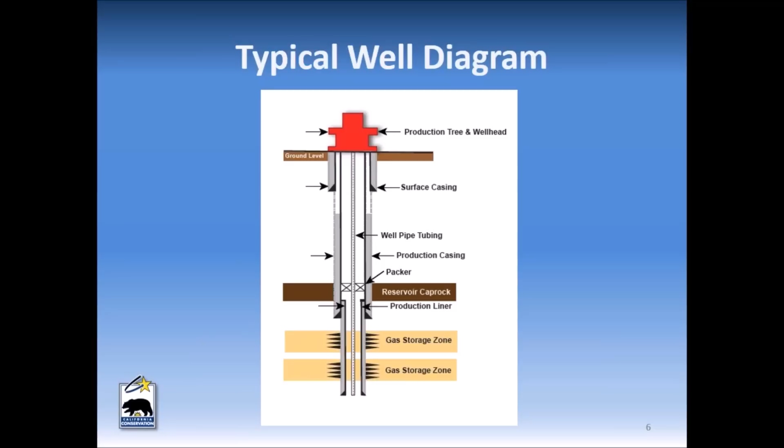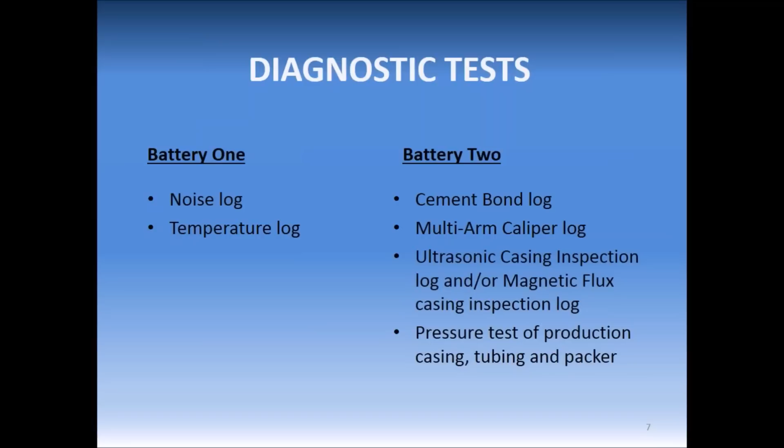In order for a well to be approved to return to service, Southern California Gas must conduct a series of 6 rigorous diagnostic tests. Those testing results are reviewed and validated by DOGGR engineers, including myself. The 6 tests were divided into 2 batteries.

Battery 1 test consists of noise and temperature logs. The first set is essentially an initial diagnostic. These logs can be run very quickly, taking 2 to 6 hours per well, depending on the depth of the well. No drilling or pulling rig is required to run them, only a wireline truck.

These trucks can be deployed very quickly, in a matter of hours. These logs were run as a screening criteria to determine very quickly if there were other damaged wells which needed immediate attention. We did not find any.

The temperature log is run from the top of the well to the bottom of the well. It's basically a thermometer at the end of a wire that's lowered into the well. Temperature should increase as you go deeper. The earth is warm and the increase is relatively uniform. So we are looking for cooling events or other temperature anomalies.

When gas escapes from a container, it cools the surrounding area. Your refrigerator and car air conditioning work based on this principle. Another reason for a temperature anomaly could be the movement of water, either because of shallow groundwater or water flood.

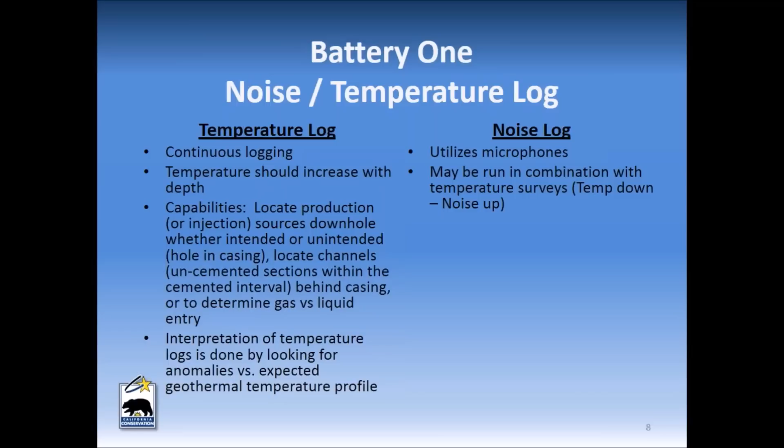The noise log is run from the bottom of the well back to surface. It's a very sensitive microphone and can pick up the tapping of a hammer or other surface noise from several hundred feet down in the well. Gas escaping from a vessel or chamber usually makes a high frequency sound, similar to a small hole in a tire after it's been punctured by a nail. The noise log will record that sound, which I will show you shortly.

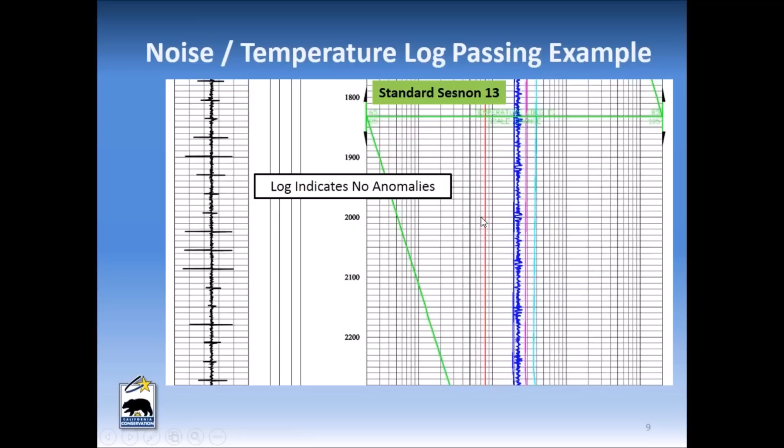So here we have an example of a passing noise and temperature log. This is an actual test result from an Aliso Canyon well, Standard Sesnon 13. If you look at this, you'll see these numbers here represent the depth of the well. This green line here is a recording of the temperature of the well, and as you can see, as you go deeper, the temperature is increasing. These curves here represent the noise.

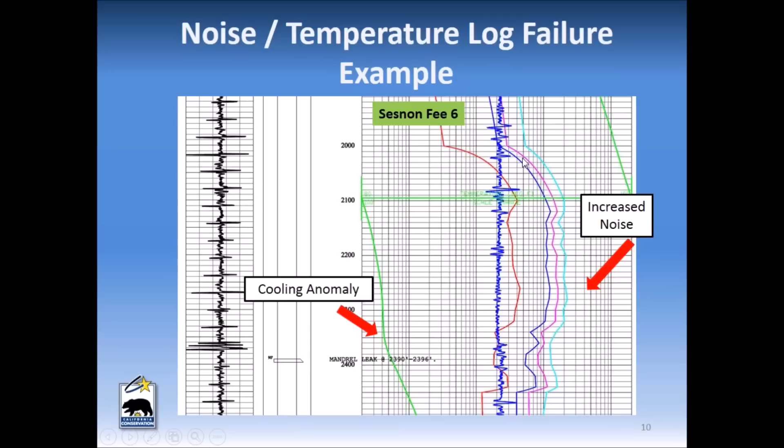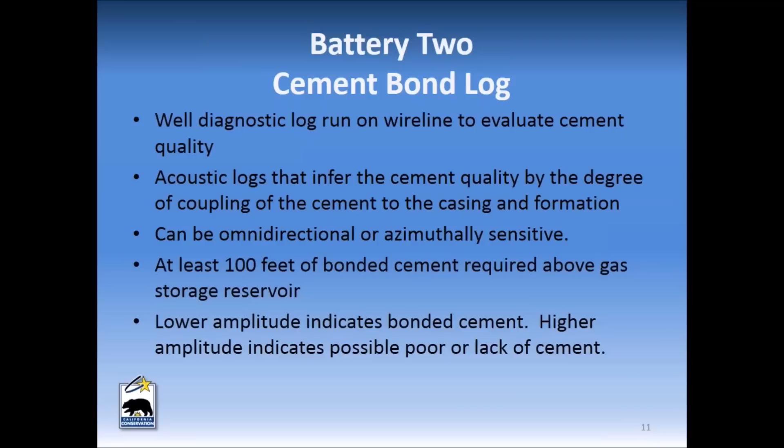A cement bond log test uses ultrasonic sound to evaluate the quality and location of cement on the outside of the casing. DOGGR requires at least 100 feet of bonded cement above the gas reservoir for a passing test. Low amplitude readings indicate bonded cement, while higher amplitude readings indicate poor bonding or lack of cement. This is the first test of the second battery of tests.

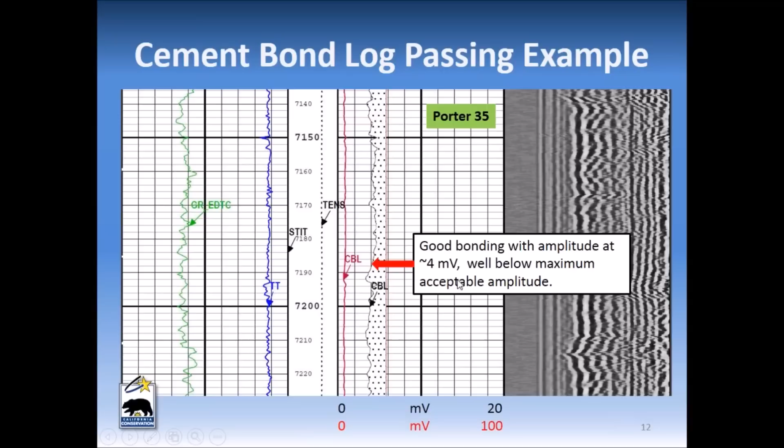Here is an example of a cement bond log run on Aliso well Porter 35 that does not indicate any concerns. Again, you can see these numbers here represent the depth of the well, and this is a presentation on the recording of the cement bond log. This is the scale 0 to 20, and this is the scale 0 to 100 for the red line. What you'll see here is we have good bonding with a recording of about 4 millivolts, which is well below the maximum accepted amplitude.

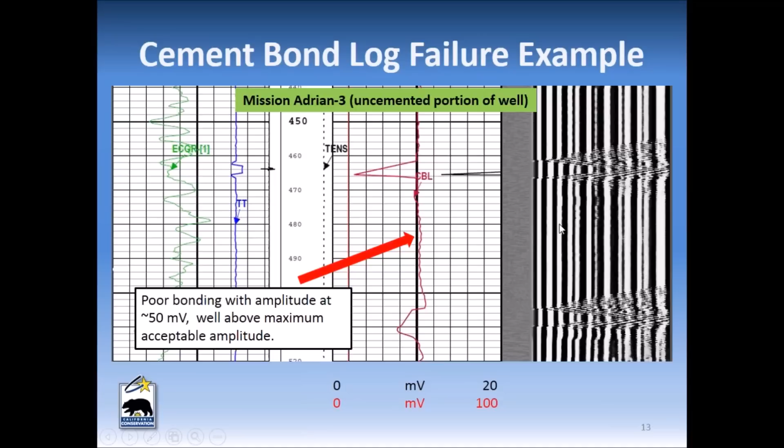You'll notice over in this track, this is what we call a railroad track pattern. So there's nothing for the sound to react to.

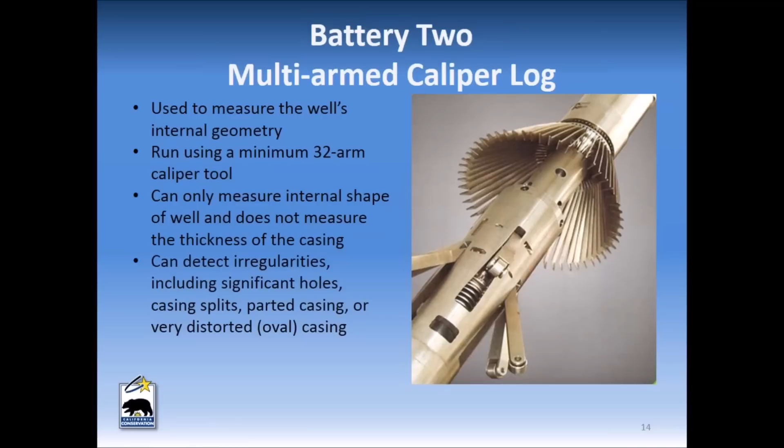The next battery 2 test was a multi-arm caliper log. As you can see on the tool, there are many fingers, arms, that are part of this tool. Each of the arms records what it's going against on the production casing. So this only inspects the inside of the casing and is used to detect corrosion damage and or other geometric irregularities.

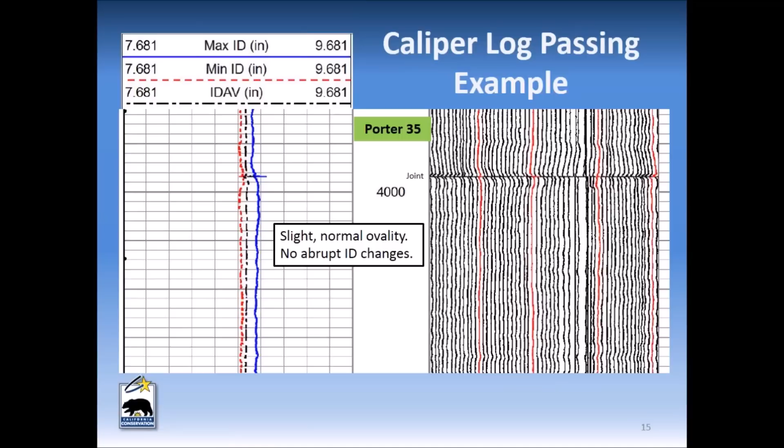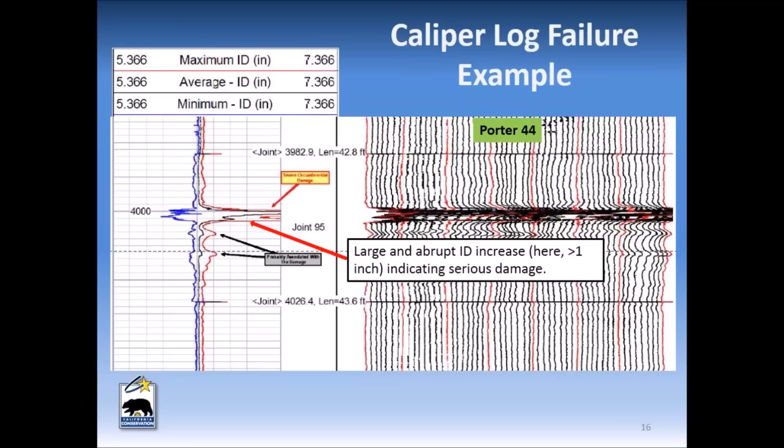This is an example of a caliper log failure from Aliso well Porter 44. All fingers of the caliper reacted to this failure in the casing, as you can see by this diagram. On this side, you'll see a representation of the minimum ID and the maximum ID, internal diameter, and you can see the damage is represented by this signature here. So this is severe damage. As a result of these tests, well Porter 44 was repaired with a new segment of pipe cemented across this section of the well.

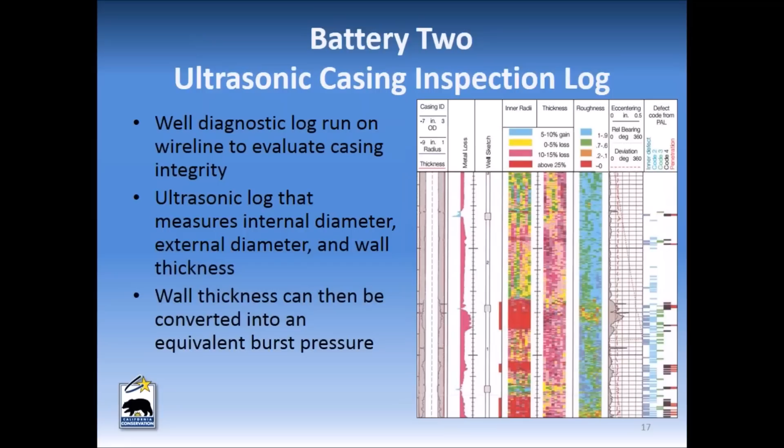The next battery 2 test was the ultrasonic casing inspection log. It uses ultrasonic technology to examine the casing thickness and cement bond quality. It can detect casing damage on the outside of the pipe, and this data can be used to calculate the wall thickness and subsequently an equivalent burst pressure rating using a formula called Barlow's equation.

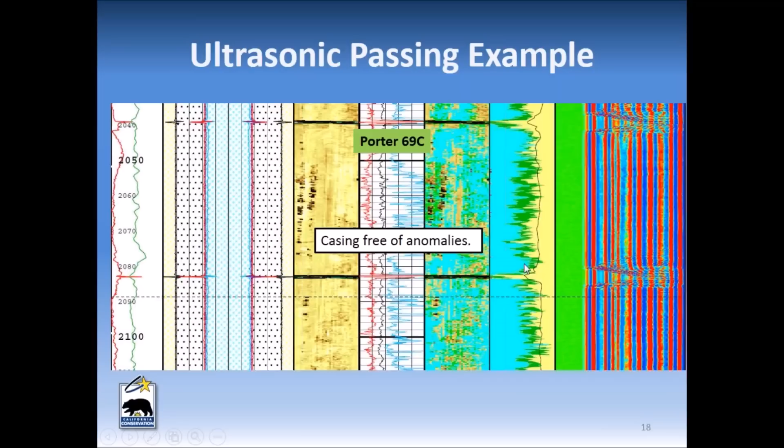Here is an example of a passing ultrasonic casing inspection test on Aliso well Porter 69C. The second track here shows good pipe as the blue minimum and red maximum curves are very smooth. The other tracks here are just representations of the acoustic impedance.

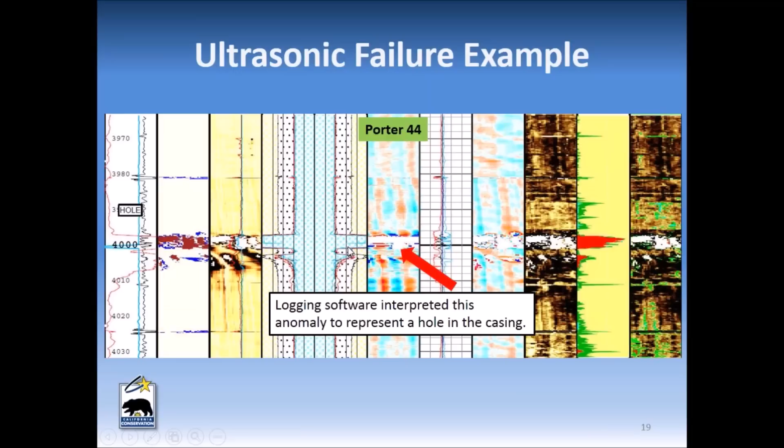Here's an example of an ultrasonic failure from Aliso well Porter 44, which was the same well that had the failed caliper test on previous slides. It's important to note that this was not another issue in Porter 44, just another test that caught the same issue. You'll also remember that Porter 44 was repaired as a result of these tests. So this is the same failure point as seen on the caliper log, and you can compare the reactions of the different tools and technologies. As you can see in the blue and red curves here, they go off scale, indicating there is serious damage in this interval.

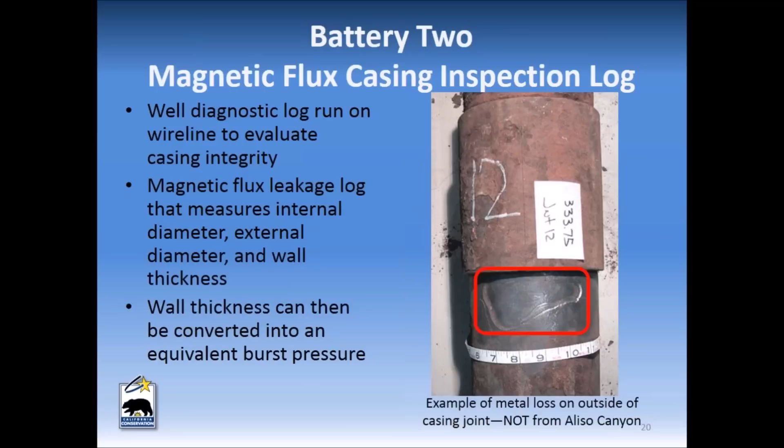The next battery 2 test is the magnetic flux leakage. This tool uses magnetic flux technology to examine the inside and outside of the casing. The tool magnetizes the steel and then measures leakage in areas of corrosion or missing metal. It's also run on a wire line. It can also detect metal loss on the outside of the pipe. This data can then be used to calculate wall thickness and subsequently an equivalent burst rating using the same formula called Barlow's equation. The picture is representative of an example of metal loss on the outside of a casing joint, but this is not from Aliso Canyon. It's only for illustrative purposes.

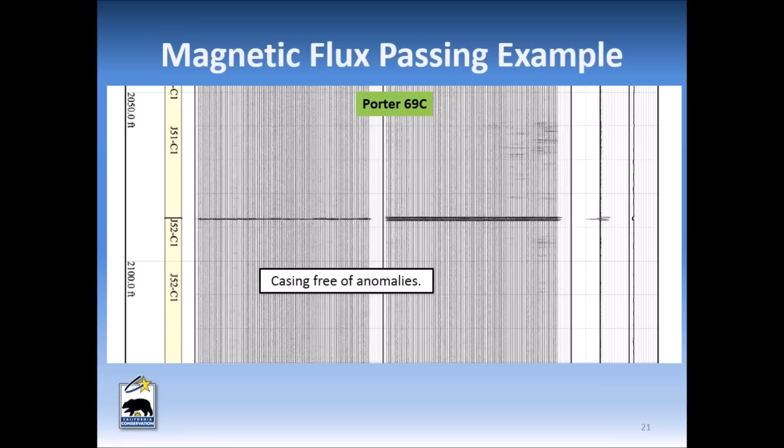Here is an example of a passing magnetic flux test from Aliso well Porter 69C, from the interval 2050 to 2100 feet. So this section is free of anomalies. Again, notice the reaction of the tool here in the area of the connection between the two pipes. This is where there's a change in the mass of metal, and that's why you have this reaction that the tool is detecting.

Here's an example of a failing magnetic flux test. This is the same failed area of well Porter 44, which we saw in previous slides. Again, this is not another failure, it's just another test that detected the same failure in well Porter 44. And so you can see why these tests are so important. These tests can ensure that wells are safe. Remember, this well has been repaired and is now in a safe condition. Again, notice the reaction in the area of the joints where they're connected here. And then this is the damaged area, and you can see its signature here.

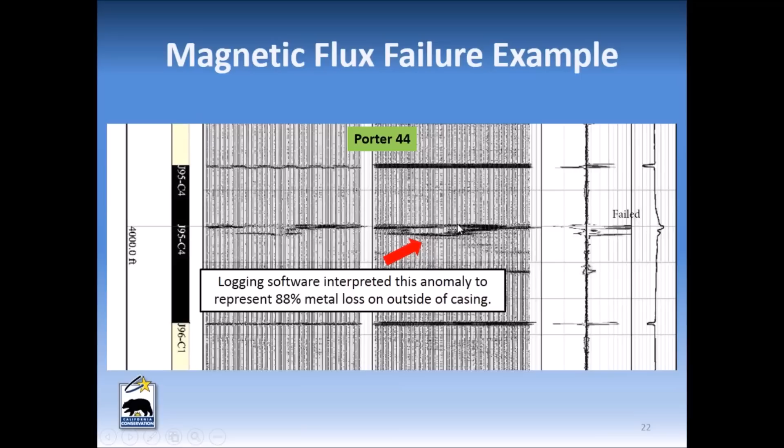Lastly, we have another level of testing done through pressure tests. The production casing and tubing must be tested to at least 115% of the maximum operating pressure, which is 3,625 psi. This is done with a test packer and fluid. Once the production tubing and packer are installed, the equipment is again tested to 1,000 psi to ensure the packer is properly set. Completion fluid is used as it is incompressible versus a gas, which is highly compressible.

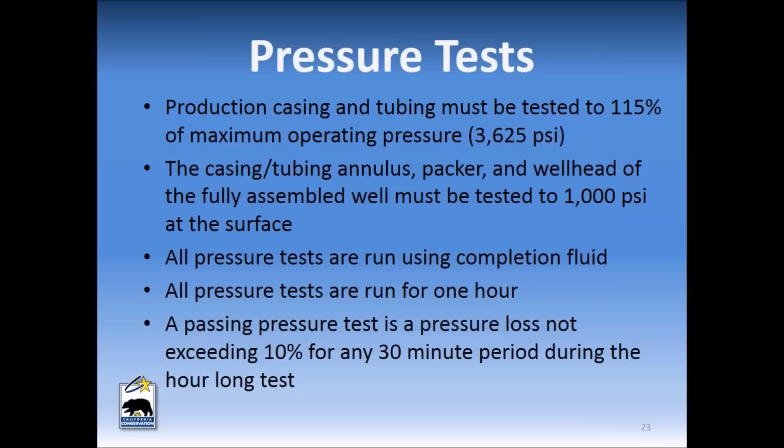Tests are for 1 hour and recorded and witnessed by a DOGGR engineer. A passing pressure test is one which has a change of less than 10% for any 30-minute period during the hour-long test, and this is to account for the fact that there are minor amounts of air in the system and other environmental factors.

Here's a passing casing pressure test example. On a test of over 3,600 psi, we have a slight change at the beginning of the test and then a period of stability, with an overall change of only 1.6%, or 58 psi.

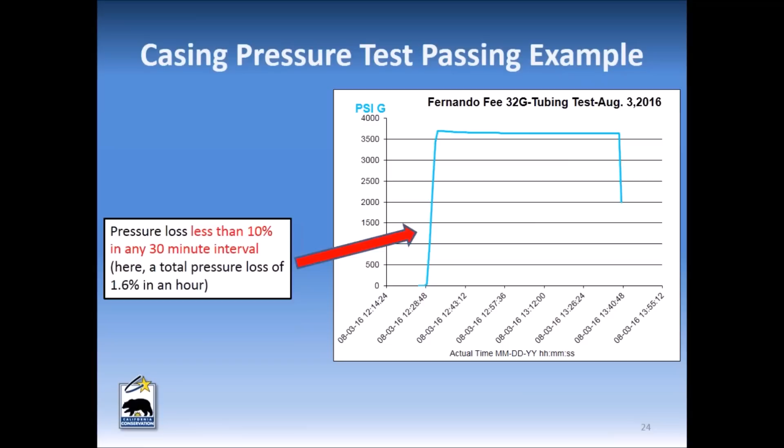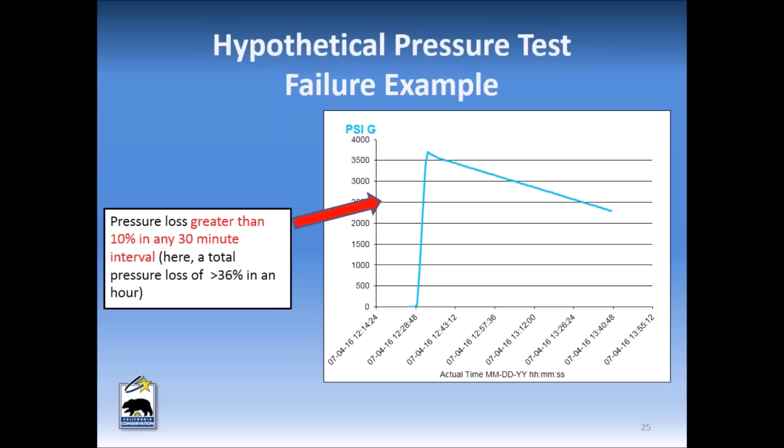Here is a hypothetical example of a casing pressure test failure. In actual testing, if you get to the test and you wouldn't usually record this, you would just transition into an investigation and repair mode. But I just wanted to show you what a failing test would look like.

Currently, there are 34 wells that have passed all 6 tests, both batteries. 1 well is in transition and undergoing testing. The remaining 79 wells at Aliso have been safely taken out of operation and isolated from the storage reservoir.

How have they been isolated safely? Well, first they had a noise temp log run to ensure that there are no unexplained anomalies. A bridge plug is then set towards the bottom of the well, and the well is filled with water. The bridge plug acts as sort of a cap on a soda bottle. This plug can contain upwards of 8,000 psi of pressure.

Remember, the maximum allowable reservoir pressure in this field is 2,943 psi. In addition, there will be upwards of 3,500 psi of water pressure from the fluid on top of the plug. So this is like having a ton of bricks on top of that bottle cap.

There is also a witnessed pressure test conducted to ensure that there are no leaks and the equipment is properly set. The production casing cement job is also reviewed to ensure the packer or bridge plug is set in a competent area of the pipe.

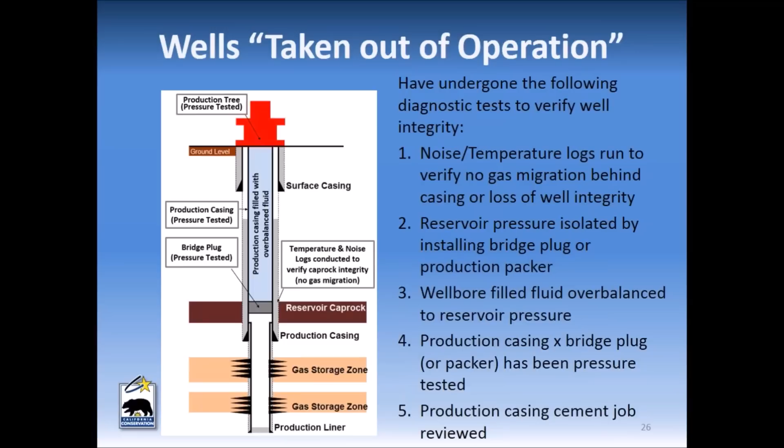Wells in this category have 1 year to be further tested and complete the second battery, or permanently sealed. When testing happens, a workover rig is put on the well, which also serves as a safety measure against leaks and blowouts. Lastly, a real-time pressure monitoring system has been installed on every well.

As part of our safety review, we set recommended minimum and maximum pressure thresholds for Aliso Canyon. As yet another level of safety, our recommended limits are well below the actual capacity Aliso could handle, and lower than the levels requested by Southern California Gas. DOGGR consulted with the national laboratories when determining these pressure limits. You can find out more about these recommendations on our website.

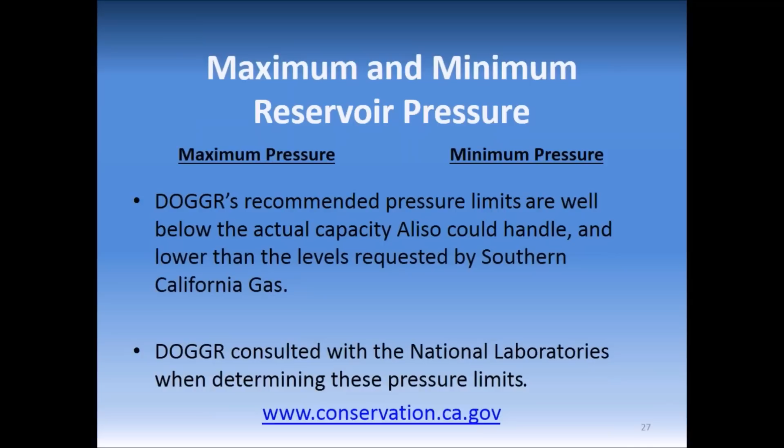The status of all 114 wells in the Aliso field and their testing results can be found on our website, www.conservation.ca.gov. On our homepage, you'll find a link to the Aliso Canyon test page, which has the test results and a report on the rest of the elements in our comprehensive safety review. We also have a GIS feature that shows the locations of the wells in the field. You can also just Google Aliso Canyon test results.